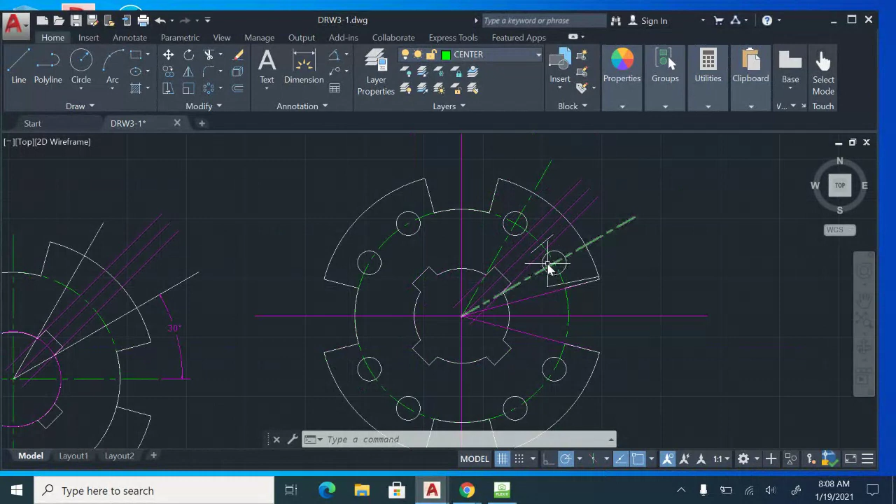Next step to this drawing is going to be the dimensions, center marks, and cleaning it up a little bit. You can see I got my polar array done. I started trimming, kind of cleaning it up.

I need to do a little bit better job with the center marks. You'll notice in the packet it's got nice center marks that are kind of curved. We'll see if we can do a better job with that. The center mark tool won't work because it'll give you a straight center mark, and it won't be curved like it is here in the packet.

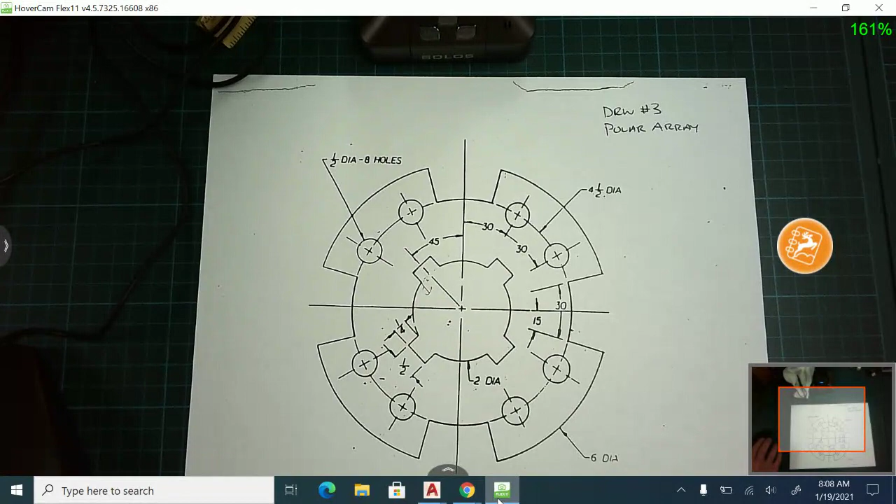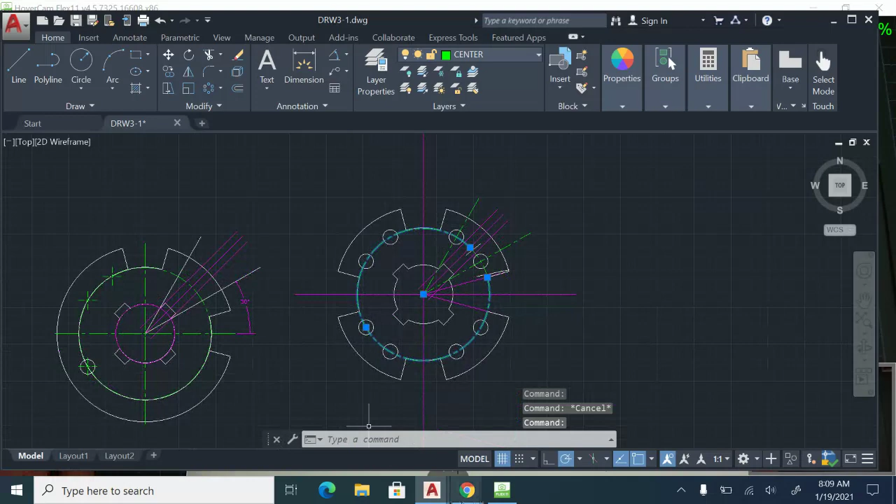So what I did is I still have these lines in there, which are my 30-degree lines to help me locate those centers. I switched these two lines to the center mark, or center layer. I still have this circle in there too, that big circle I originally started with, which was the 4.5 diameter. So I have my 4.5 diameter circle on the center layer, and my 30-degree angled lines.

What I'm going to do is trim these ones up a little bit. Instead of trimming, I'm just going to drag them because they don't need to be this long.

So it's a little bit better. However, the center mark is not quite in the middle, so I'm going to drag that a little bit that way, maybe down just a hair, being very careful that I don't screw up the angle. Make sure when you're doing that you have extension O-snap turned on.

That'll help you keep the line straight. You don't want to go and dimension that and it's no longer 30 degrees. See, I can go like this and that - now I'm no longer at the correct angle. So be very careful when you drag it down that you're not changing the angle or dragging it up.

So this part's a little tricky. You just got to play around with it. Like that's not enough - there we go.

That's not bad. And then what I can do is take this big circle, and I'm actually going to trim it. I only want a little section of it, and I'll polar array it.

So I'm going to do a TR, enter. Let's say I'll keep this, and I'll keep this. Hit enter, and I'm going to click this part of the circle. So I just trimmed that big 4.5 inch diameter circle - all of it except for this little section.

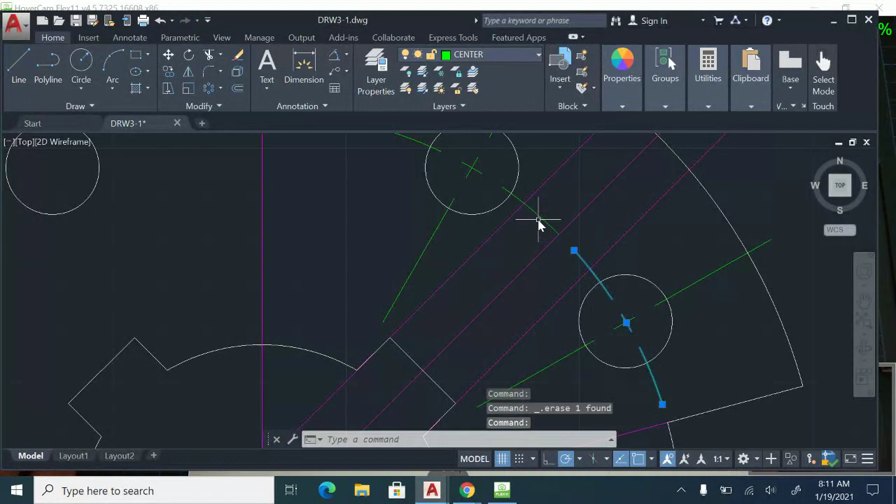If you don't have the perfect cross in the middle, that's okay. All right, so I'm going to select those. I'm going to polar array.

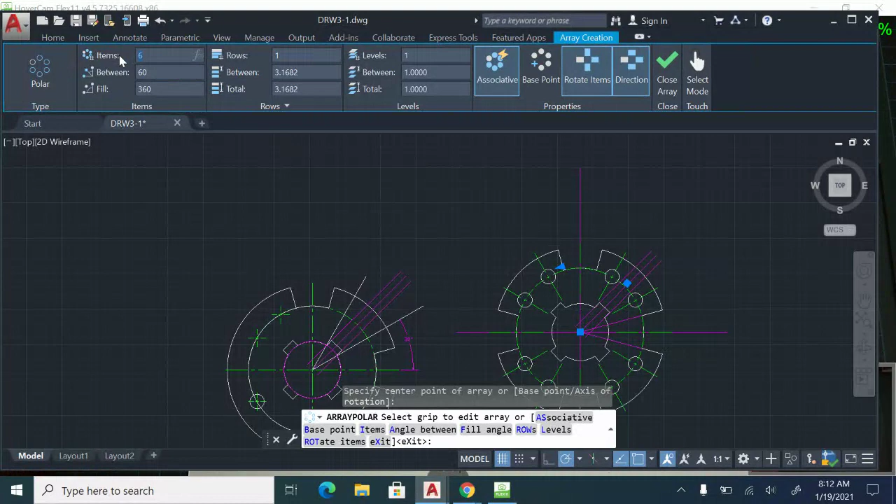Instead of doing that same thing on the rest of it, the other 6 circles, let's just polar array. I'm going to click polar array, specify my center point, and set it to 4, then hit enter a couple times, and now I have that center mark on the rest of the circles.

A couple other things I need to do is finish up my dimensions basically. I'm going to go back here and turn off the center, or the construction layer, to see where we're at.

It's looking pretty good. I need to put a big center mark. I'm going to go annotate, center mark, and click right there so I get a nice center mark in the middle of the entire part.

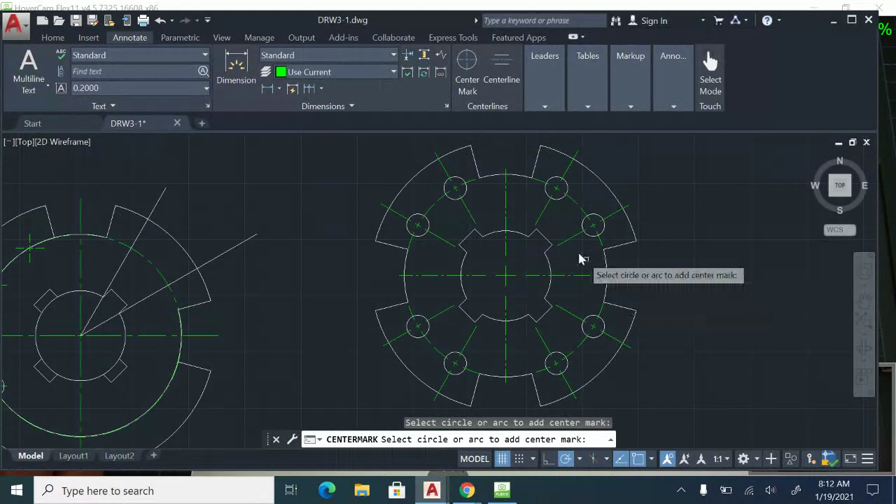I'm going to go back to home, switch this back to dimension layer. Actually, there's one other center line I need, which is this 45, from here - or I could just go connect it to that point because I'll need that to help me dimension. So when I go back to dimension layer and use an angular, I can click on something here.

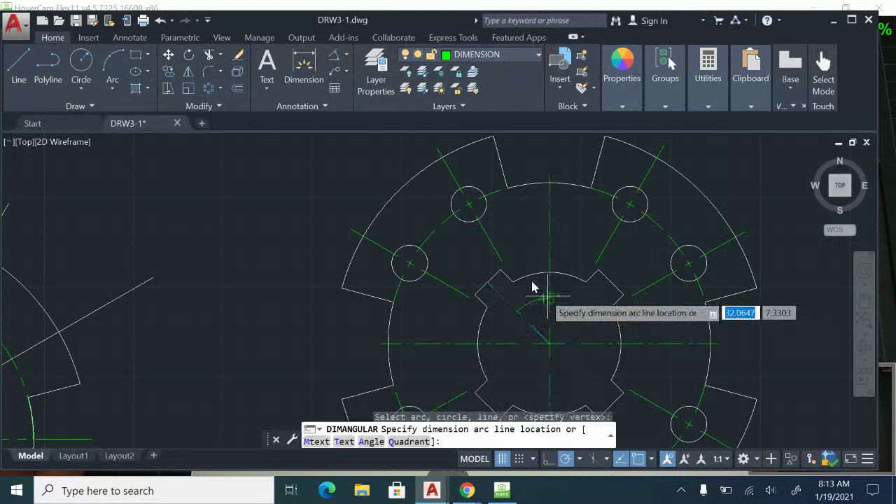So from here to there, it's going to be 45 degrees. And then I'm just going to kind of go around and put all my dimensions on here now. So I have some diameters. I have the 4.5 diameter here. I have the 6-inch diameter here.

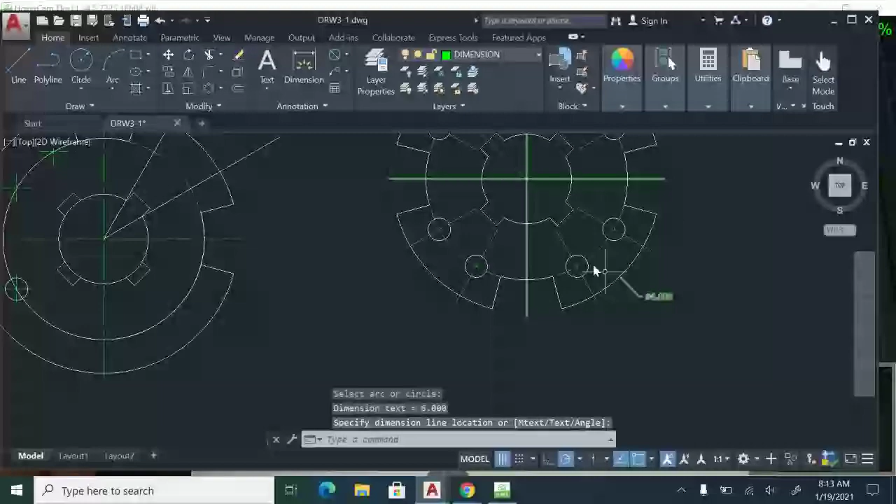For the keyway, you need to use aligned. Use the aligned dimension for that, since these are not linear, so they're kind of going off at an angle, 0.25, and then another aligned for the 0.5.

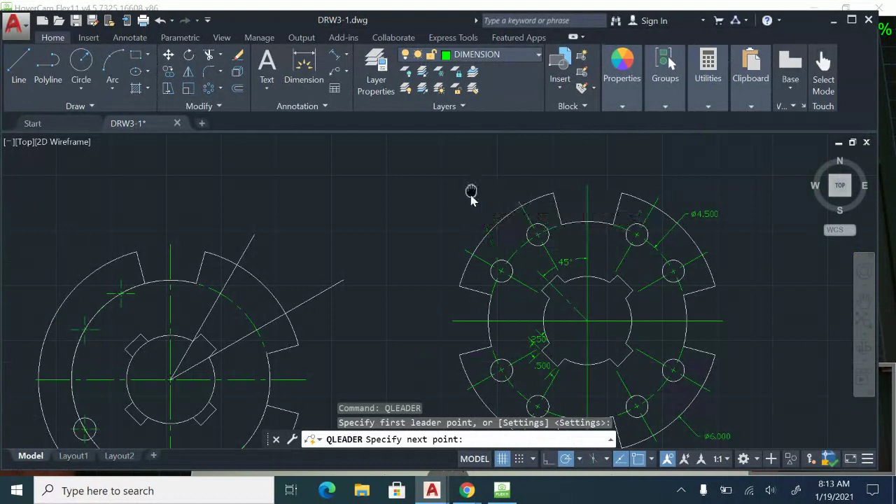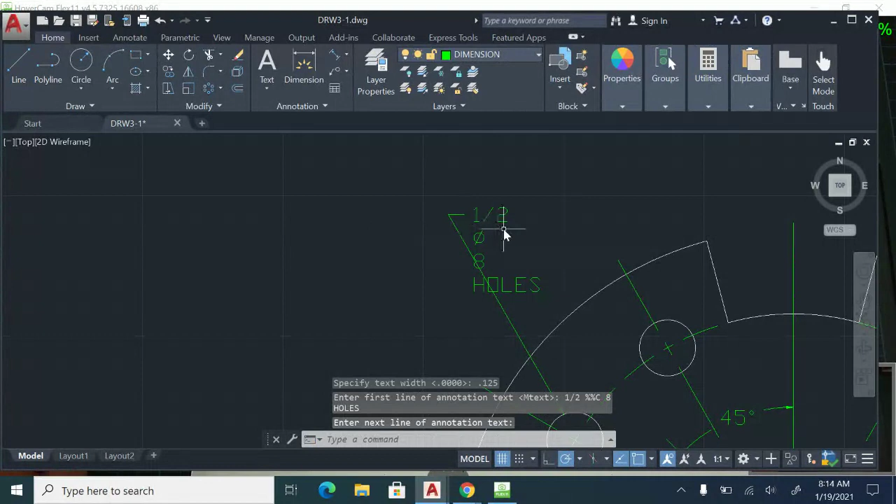I'll need to use Q leader for the half diameter 8 holes, so QL enter. And I'm going to click on about right there. We'll go up to here, click there. Remember 0.125 is the size, and we're going to type in 1/2. I can do %%C to get the diameter symbol, and then 8 holes, hit enter twice. I can double click that, and I can drag.

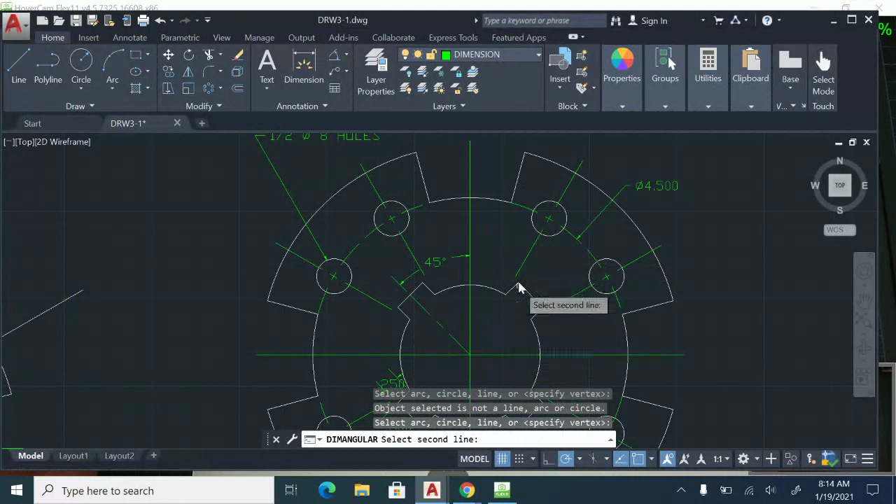We'll go - I guess we'll put it all in one line. I have a few more angular dimensions I need to get in. I have from here to here is going to be 30. Actually, it would be, let's see, we'll go here.

One other thing too, when I polar arrayed the center marks, I actually need to explode those now, because right now it's all one. So I want to go back to home, select the polar array, and then use my explode tool here. So now they're back to being individual lines.

And also probably when I did the 6 diameter, it gave me a second center mark. But if I delete it, it's going to delete the 6. So I can also polar array that too, or explode it, I should say. Let's click the 6, hit enter, and I can delete some of these center marks. I got too many center marks on here now.

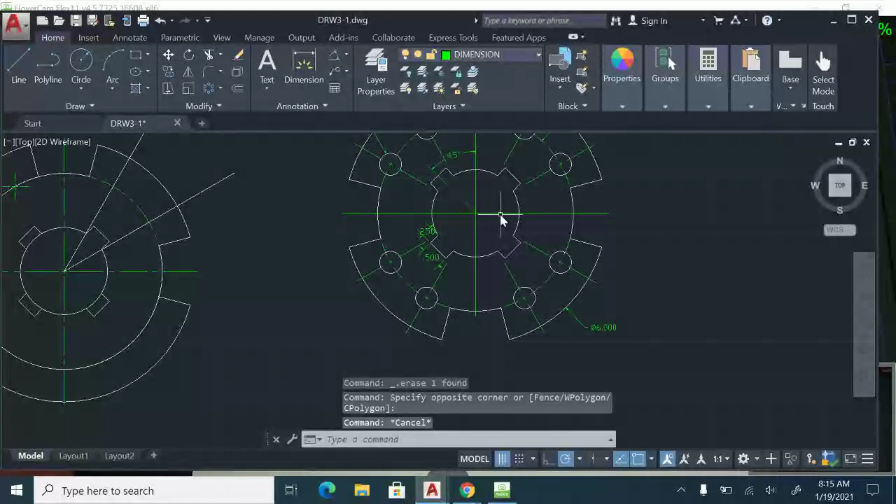And then same thing happened when I did the 4.5. So let's click that one. I'm going to explode. So again, this is just kind of cleaning up. See how I had multiple center marks on there, and it was actually covering up kind of my nice one that I originally did. So again, to delete the ones I were covering up, I had to explode the dimension first. Then I'm able to delete the center mark.

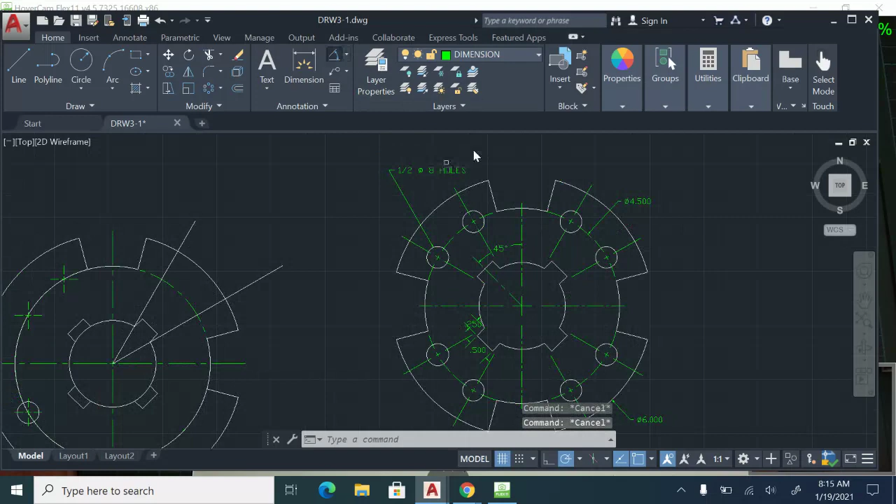And then from here, I got a few angulars. I have from here to here is going to be 30. From here to here is also going to be 30. And I'll try to line them up as best you can.

I believe I have a 30-degree dimension from here to there. And then a 15 from here to here. So again, these are all angular.

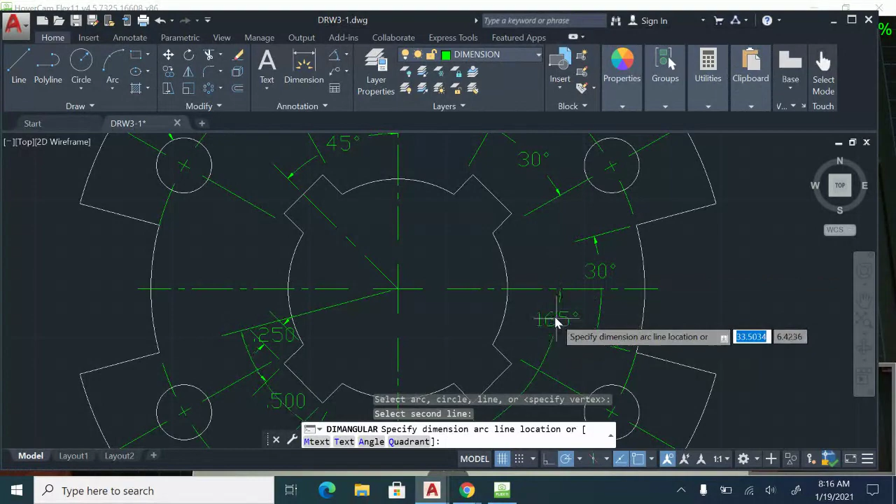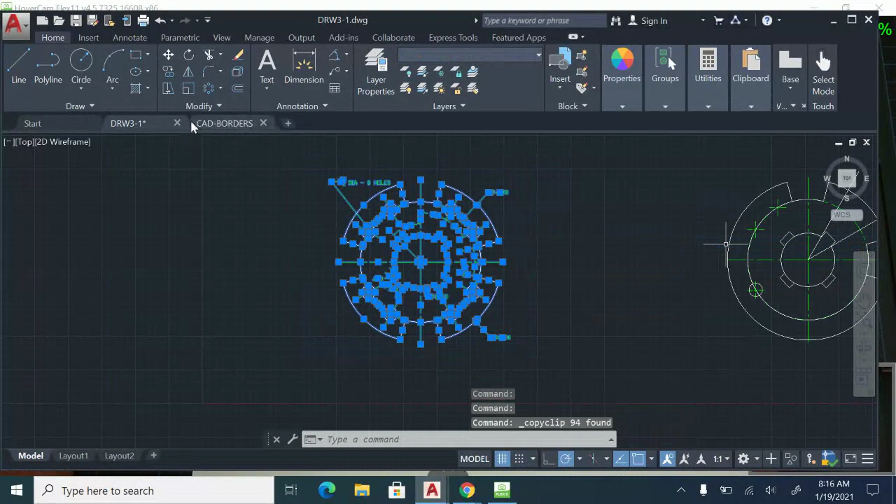And we'll set this one up on - I have to open up my CAD borders here really quick. For some reason, this drawing is not on CAD borders. We're going to set this up on ANSI A, I believe ANSI A portrait. Let's take a look and see how that'll fit, though.

So paste, I'm going to go ANSI A portrait. I'm going to double click in my viewport. Make sure you set it to 1:1 scale. And yeah, it should fit in there nice. Double click to get out of the viewport. And there's my finished polar array drawing.

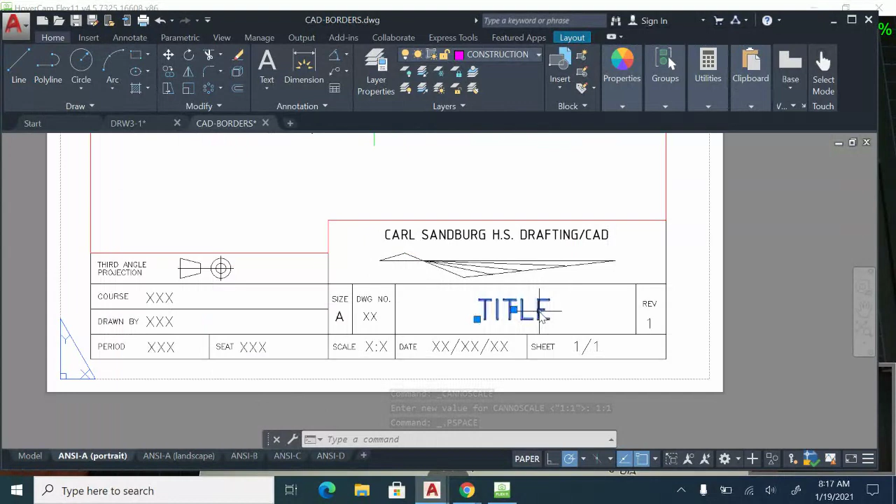Make sure you fill in your title block. Again, if something doesn't fit - actually that one fits nice. This is drawing number 3. Fill in your date, your scale, course, and the rest of the information.

And again, make sure you're saving to your Google Drive. So I'm going to do a save as. So good, my Google Drive is here, my drive, here's my CAD 2 folder. If for some reason the Google Drive was not showing up in AutoCAD, then you have to type here to search. Type in drive file stream and load your Google Drive.